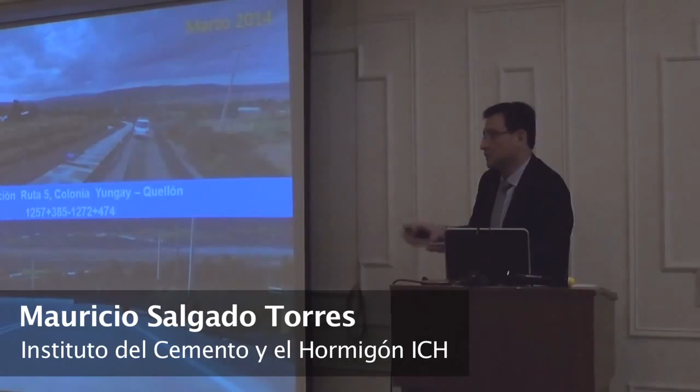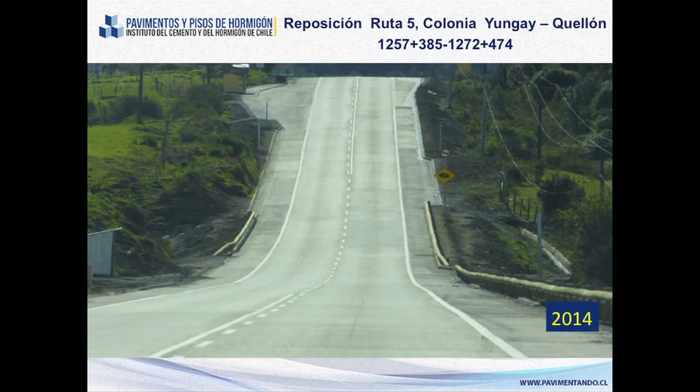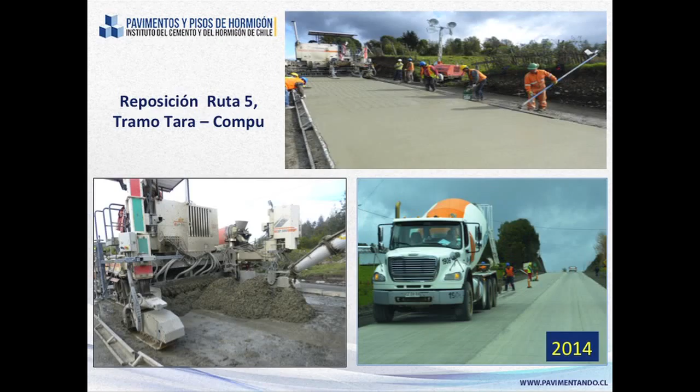Due to timing purposes, I would like for us to start this presentation with a project that is quite important for me, because fortunately I have had the opportunity to see paving works from Mexico to the Patagonia. And one of the companies that has given me a very good impression regarding the way of working and their performance is Vilicic, because in several aspects, from my point of view, they are a role model in terms of works execution. And here we have the author of these paving works.

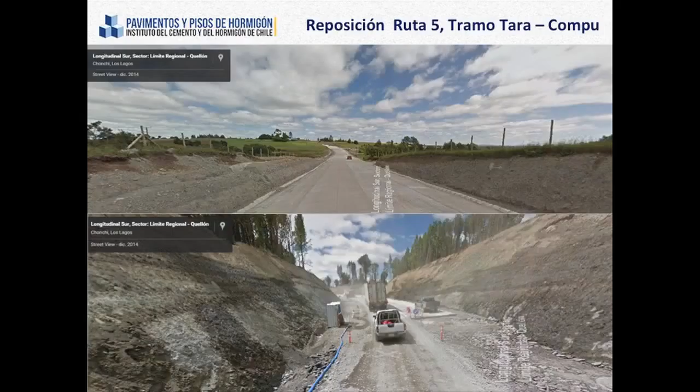And since it is in Chile, I consider it ours. So I'm very pleased to present it. Therefore, I would like to thank them for this, because for many of the things that I can tell you, she keeps me updated with all the information.

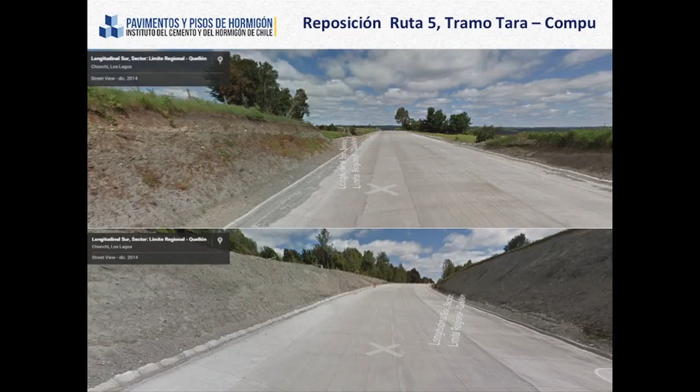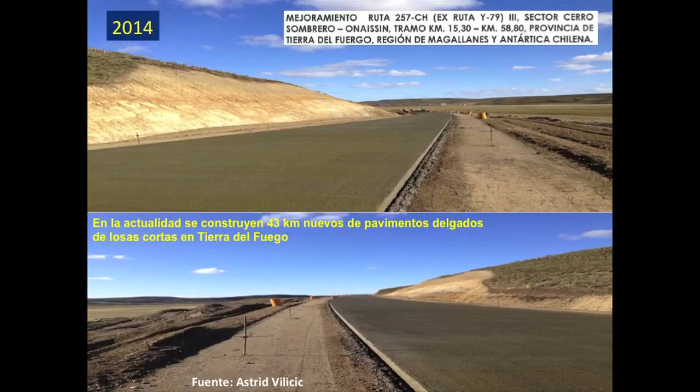I would like to highlight some interesting details of these works regarding performance and the works in general. This was quite an important milestone because it was the first work that combined the optimization of thicknesses through optimized geometry, this means short slabs, with the incorporation of synthetic fiber. So several milestones took place that set the starting point for a new generation of concrete pavement here in Chile.

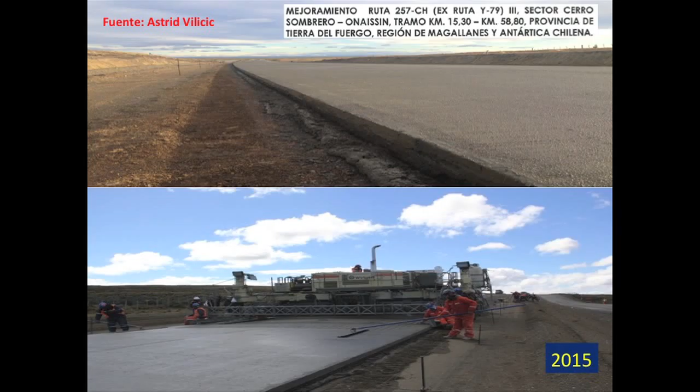Of course, there have been several generations of concrete pavement, but I'm referring to the last historical moment where there have been many modifications in the specifications, in the way of building. There have been some technologies incorporated that seemed impossible some years ago, and some of them are even a reflection of what the entire world is looking at here in Chile. Those works had some interesting highlights as well. But now I will let you know about some milestones.

For instance, in Route 7 in the region of Aysén, you will find the project El Toqui La Zaranda that was carried out in 2011 under the initiative of Cesar, who was the manager for this section, where we had the opportunity to check the behavior of different types of fibers and the effect that they could have in terms of optimization. This project, according to Cesar, has been in service for 4.5 years, with optimal performance in general terms.

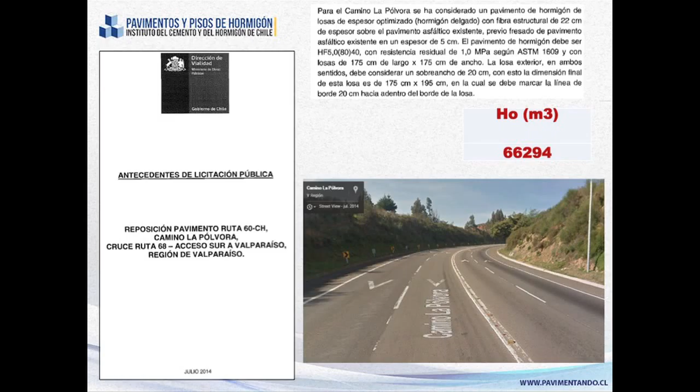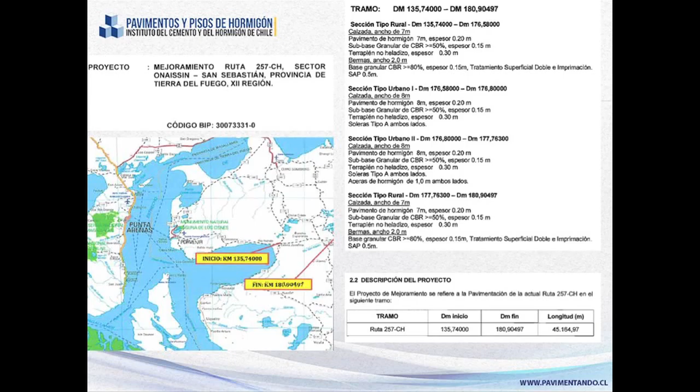And for those of you that know the region, you know that Route 257 is the main road of the region without having very high traffic. And this section, despite being a test section, is a road of definite character. Here we gathered a lot of knowledge and information, and this project even has a weather station whose purpose is to provide input data for future projects that are being designed with this methodology. These are some pictures of the last time I visited that section some years ago, and it is in optimal conditions.

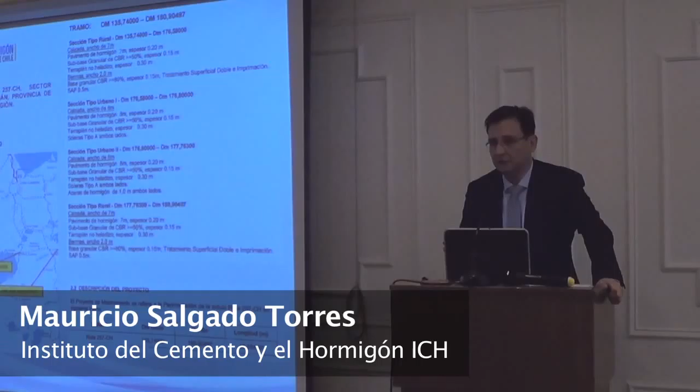Another interesting project for us, which was a milestone back then, is the replacement of Route M50 Cauquenes-Chanco. This 15-kilometer project in short slab in the 7th region was also a milestone from the point of view of several execution aspects for concrete pavement in Chile. One of the most important details is that a high percentage of the works was carried out as night paving, which was practically new for those of us used to these types of works in Chile.

And it addressed a problem that was substantially dangerous in the execution of this project, given its geographical location. In that zone in particular, thermal gradients could lead to a very severe construction curling that could worsen the future performance of the pavement. So we tried to go to the source of the problem, and we tried night paving to reduce that risk.

These pictures have been taken from the Google Maps Street View platform. I wanted to bring them from there because many times when I show pictures in my presentations, people say he took the best angle of the pavement. But the truth is that this is not the case. I take the picture that I believe is the most representative one. And as proof of my independence, I invite you to do a virtual tour through the road to see that I took a random section that represents the condition of the short slab pavement. There you can see the historical record.

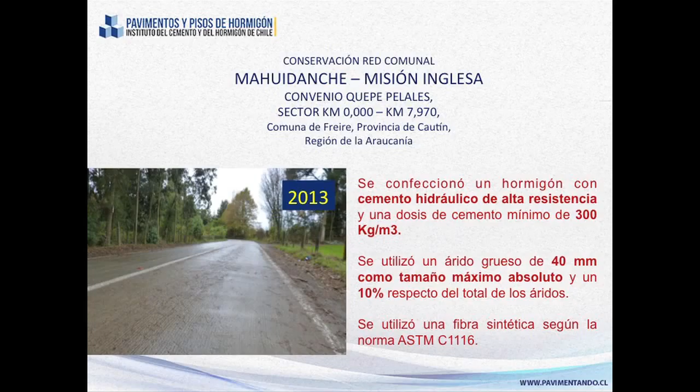Currently, this is a benefit because one of the aspects where concrete pavement is vulnerable is the feeling that I have to wait a long time until I open it to traffic, with the possibility of not only measuring maturity, but also processes that make concrete more mature and that can allow opening to traffic. The benefit that it implies is what happened in this project, for instance.

And according to what the supervisor reported, we're talking an average of about 4 or 5 days until the opening to traffic under normal conditions. And I'm talking not only of lightweight traffic, the entire route under normal circumstances. You see that we have those typical Scania trucks already driving through the road after the third or fourth day of executing the works.

And that is an important milestone in terms of what a contractor needs today, which is to speed up processes. This makes this possible, and they also imply a scale economy. All these projects at the beginning were possible thanks to modifications in their specific specifications, and to the extent that a bank of information was being built that allowed us to have the tools to do this in the best way possible, comes the instruction on new technologies, on technical specifications for pavement.

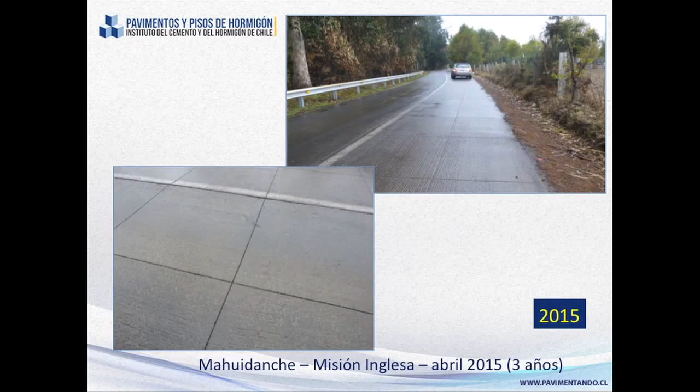These guidelines, despite the fact that it is a document that was published in 2012, we have looked at all the mechanisms to distribute it. I always run into the fact that there are people that do not know about its existence, but it is very important because some of the technologies still are not part of the road manual. This document enables them to be used in Chile.

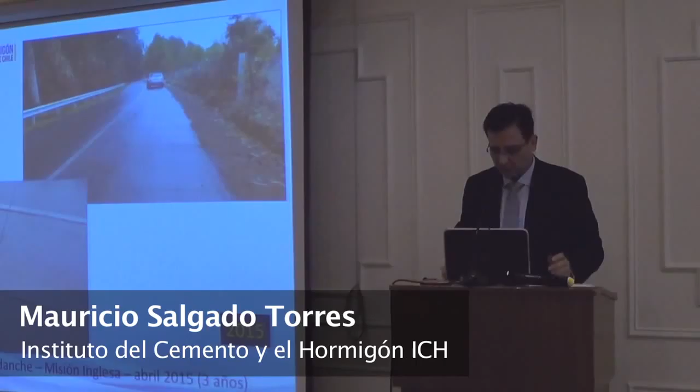So thanks to this documentation, and we will have to update it at some point to the new experiences that we have had over time after 2012, it is a document that you can access through us through pavimentando.cl, where you can download this document, or by contacting us, and obviously with the National Road Laboratory. And it's important for you to read this document because it enables many of the technologies that can be used currently.

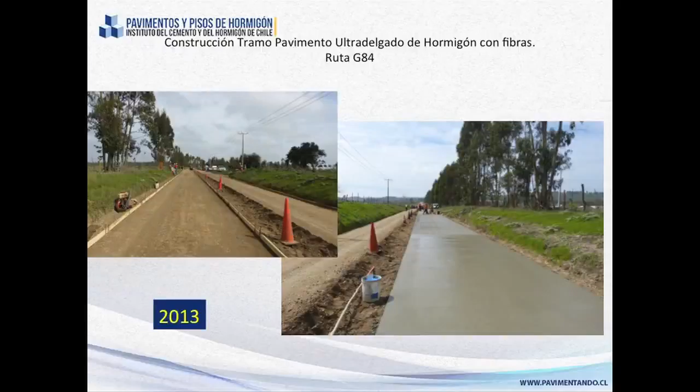This is another initiative that I want to highlight because this is the joint work of Regional Metropolitana. At a given moment, do we have someone from Metropolitana here? They told us about their problems, their needs. In this case, it was Route G84, the old access to Colina, and it had a problem that the asphalt that they were placing had a scarce permanence over time, and they wanted something that lasted longer. And this is how we looked at the possibility of incorporating a short slab concrete in this access.

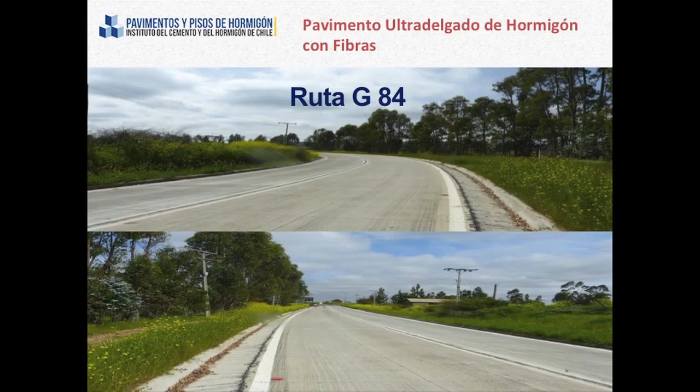You can actually visit it, and we inspected it several times because this is the closest one that we have to Santiago in terms of short slabs. And once again, these are images of Google Maps and Street View to show you a representative picture of that pavement, how it used to be in 2012, when we visited for the first time and we made the decision to intervene it, and how it looks now in October 2014, according to Google.

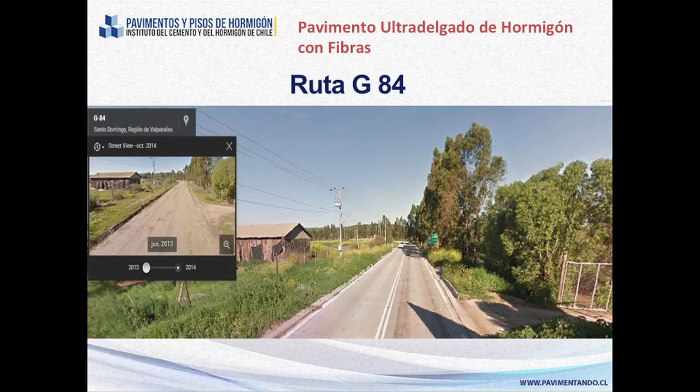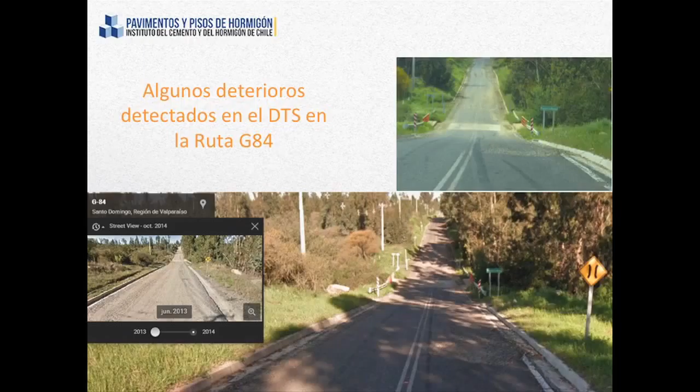In the summer of 2013, we did the execution of the construction. Here are some pictures of January 2013. And here, the pictures that Google took were in the construction process, which was in November 2012, where we started the works, and it ended in January. And in April 2013, it was already in service. And afterwards, there have been several updates where you can see the current conditions of that pavement.

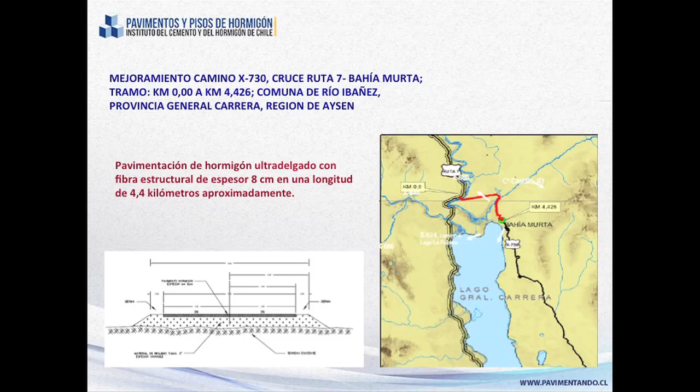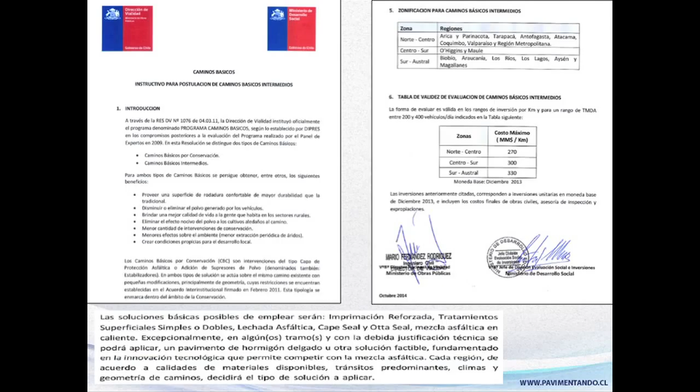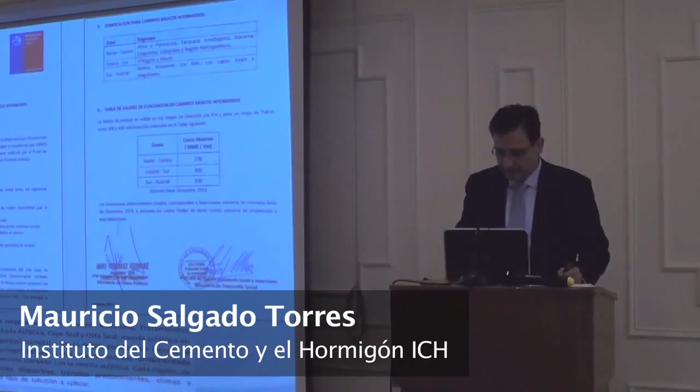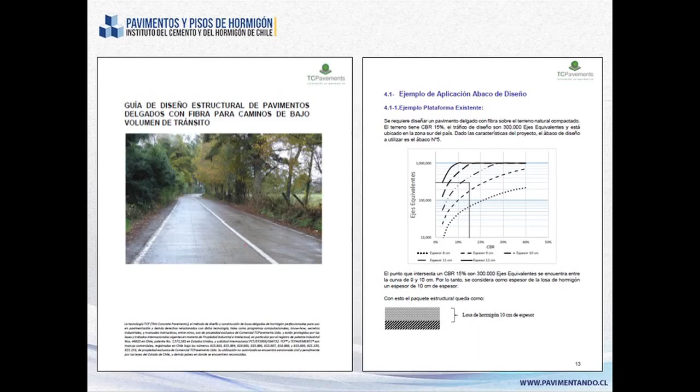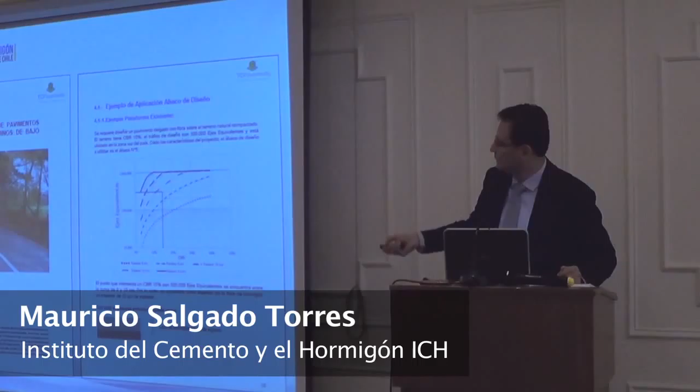And I'm showing you this because in the case of these kind of pavements, it is not only the opportunity of improving it, but it also gives you an economy of resources where you can get, with the same amount of money, a section and an improvement of the road. And this is what we have achieved with the incorporation of optimized pavements as a general project.

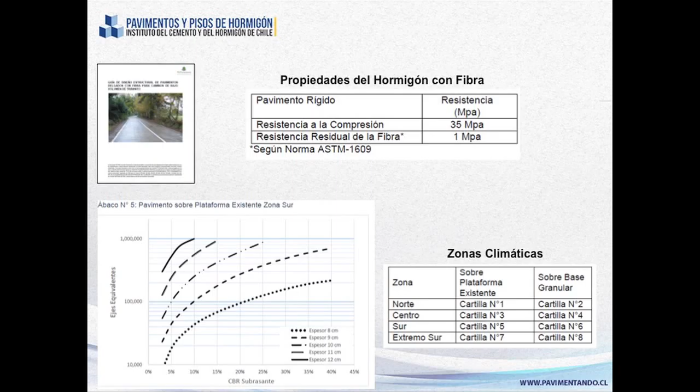So probably with other conditions and structures, it would have been impossible to get to that level of improvement in the route. So we have cross sections that are interesting in the island, that they didn't have before, and that reduce traveling distances from Puerto Montt to Quellón. Here I can tell you many stories of how long I took to get to Quellón and how much time I take to get there now that the route is practically finished.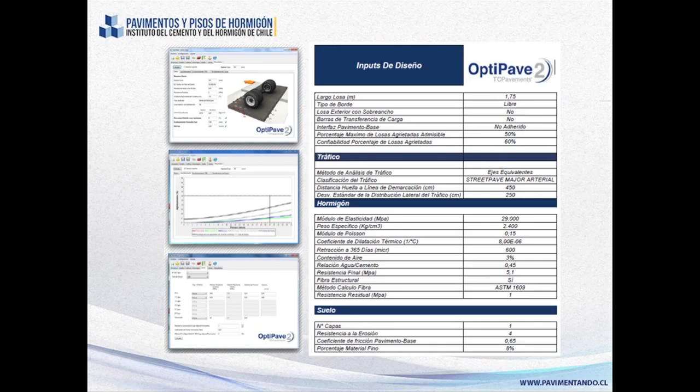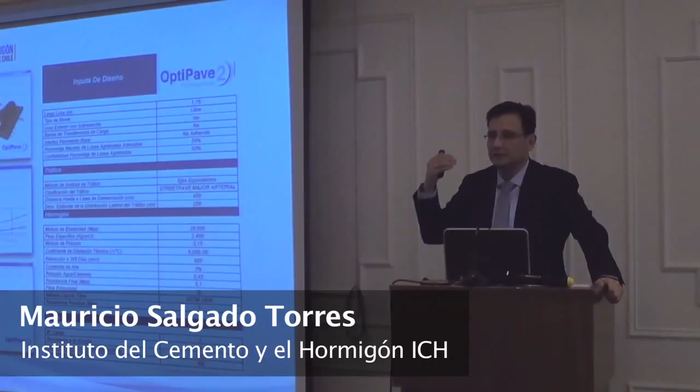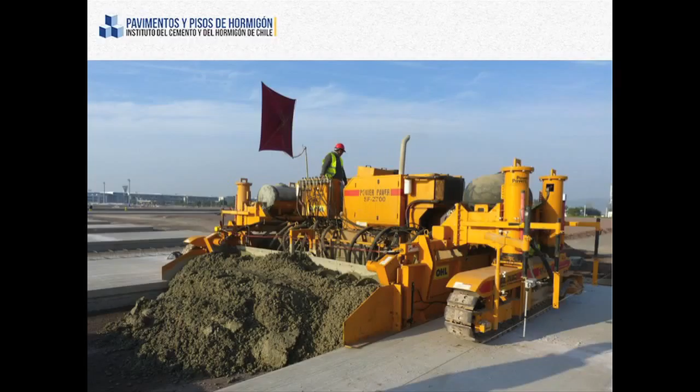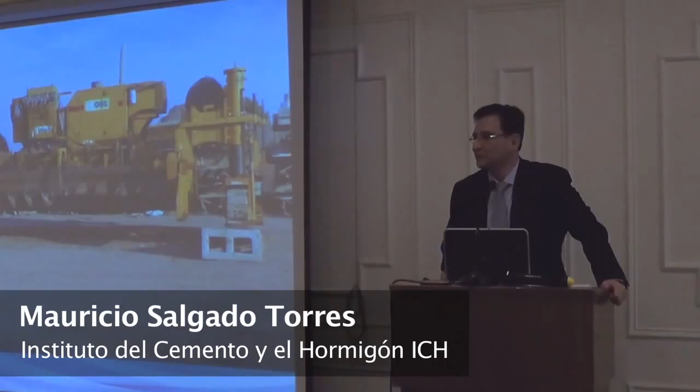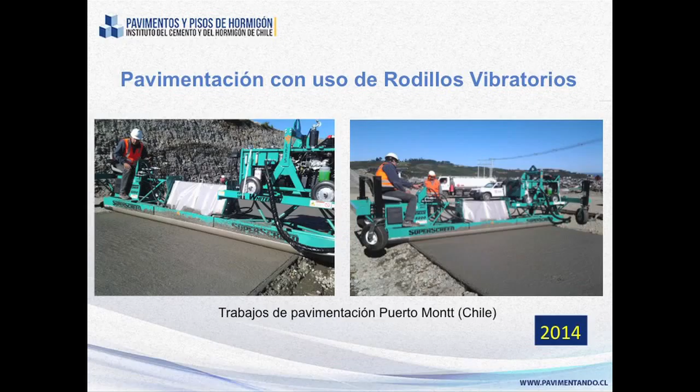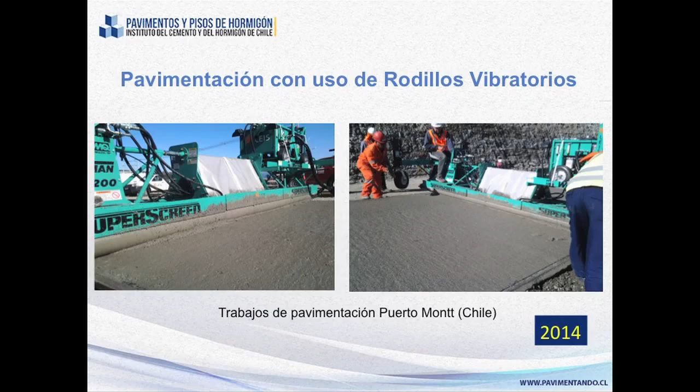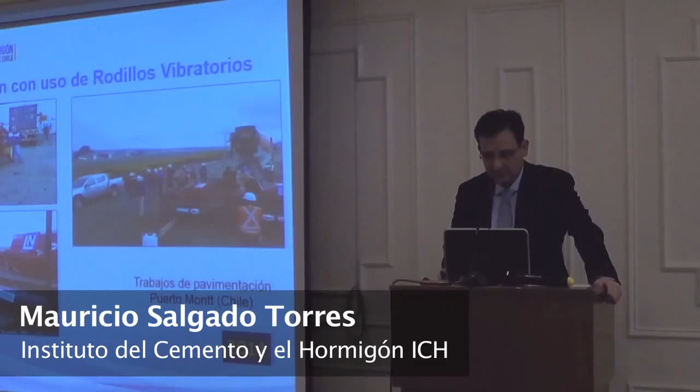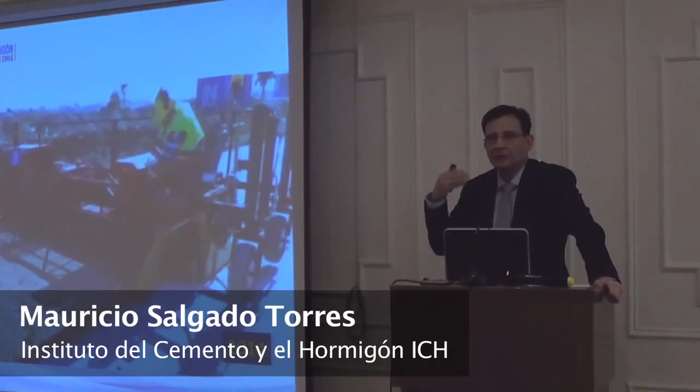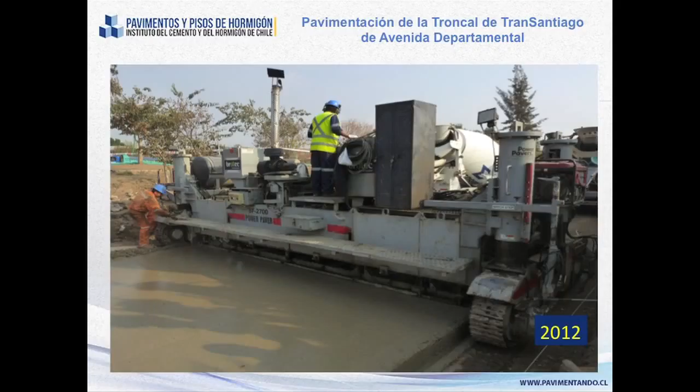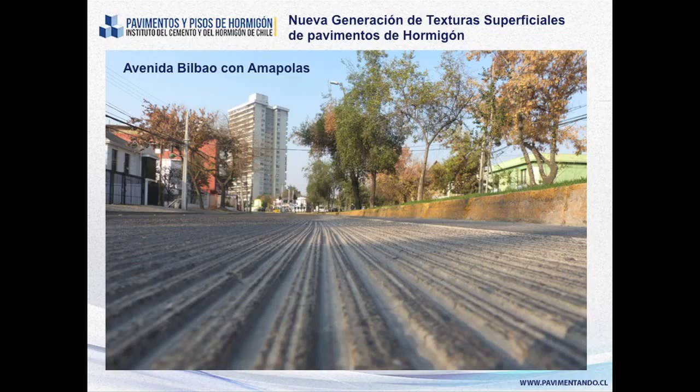There is a second possibility that derives from the short slabs that we have been pushing for recently, that will be interesting not just for Chile but other Latin American countries, which has to do with what we call ultra thin pavements of fiber concrete. This is for low transit roads, unlike the Pólvora route, the powder route, and others that have significant traffic.

We're talking about an application that is a niche that until recently seemed to be impossible to take on, which is low transit roads. For persons who are not familiar with this, for low transit, they say concrete would be impossible to use here. But as a consequence of technological changes incorporated in recent years, we can already reduce costs and make it possible to implement these solutions at the level that you have probably heard, which are the basic roads or intermediate basic roads.

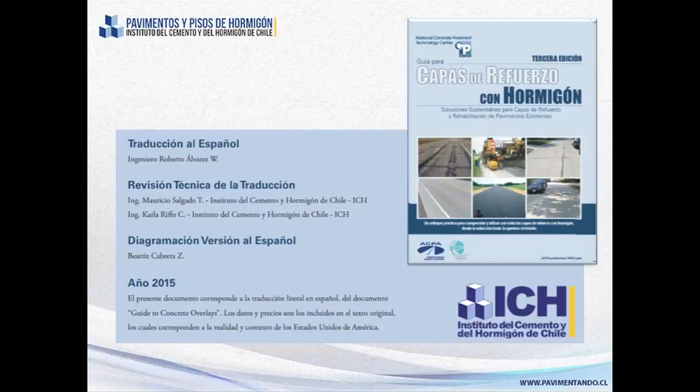The Institute of Cement and Concrete is currently giving the translation of a document of around 150 pages that provides an updated general overview of how to address the rehabilitation of existing pavements through the overlaying of concrete.

The guide for concrete overlays in its third edition was published by the National Concrete Pavement Technology Center in May 2014. It includes not only a broad range of technical aspects of this type of solution, but also, among others, aspects related to the organization and management of construction areas, how to face the relationships with the people affected by the works, and how to minimize the times that it takes to materialize works.

As it is mentioned within the text itself, the following are the main scopes and objectives of this document. The guideline for concrete overlays has the purpose of filling room of knowledge and answering the questions of the owners of pavements so that they can include the necessary concrete reinforcements as a reliable tool and make more informed decisions on their design and construction.